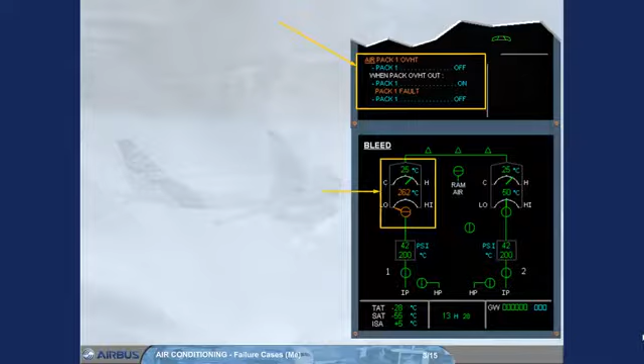Let's look at the indications. A failure message and associated ECAM procedure have appeared on the engine warning display. The ECAM bleed page has been automatically called to show amber indications, and a fault light has illuminated on the AIR COND control panel. Note: the caution message is triggered if the pack outlet temperature has been detected above a high limit, or during the flight it has been 4 times above the amber temperature indication threshold.

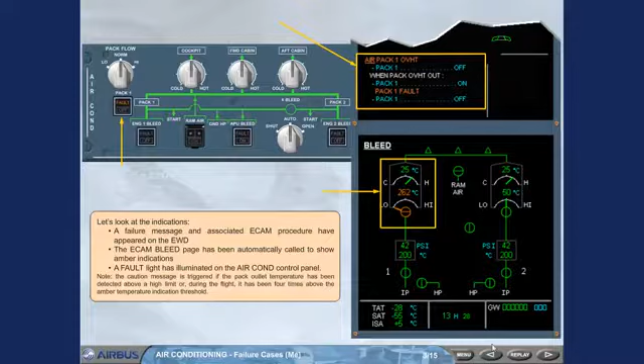Before you begin, notice that the pack flow control valve has closed. This occurred automatically to protect the pack from damage, as the compressor outlet temperature amber limit has been exceeded. The valve color indication is amber, because the valve position disagrees with the push-button switch position.

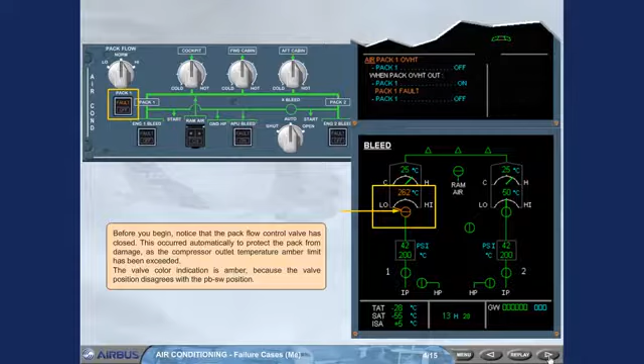The first step on the ECAM is to turn pack 1 off. This is to match the pack push-button switch with the pack valve position, and also as a preparation to reset the pack. Note that the fault light on the pack push-button switch is on, to help locate it, and to inform about the overheat condition.

The pack 1 push-button switch has been pressed off. Its off light comes on, and the pack valve indication turns green, showing valve switch agreement. Notice that the fault light is still on.

The completed procedural step disappears from the engine warning display. The compressor outlet temperature is now decreasing.

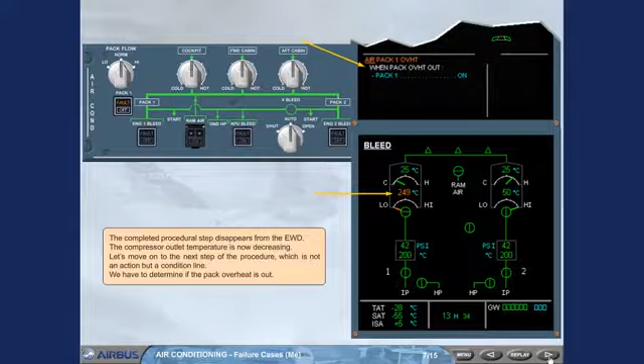Let's move on to the next step of the procedure, which is not an action but a condition line. We have to determine if the pack overheat is out. The fault light is off, and the compressor outlet temperature indication is green, so we can conclude that the overheat is out.

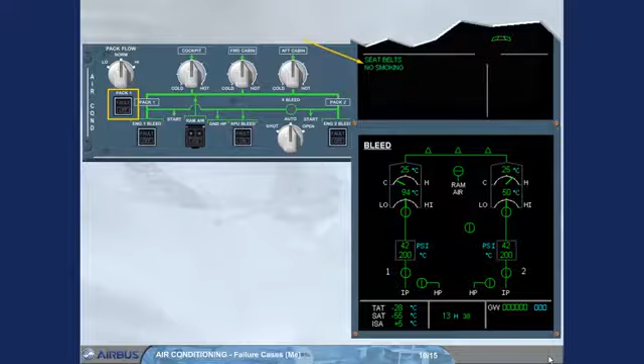Therefore, do the next ECAM action by switching pack 1 back on. When the pack push-button switch is set back to on, the off light goes off. Normal memos replace the failure message on the engine warning display, because the failure condition no longer exists, and the system display returns to the cruise page.

You have now completed the ECAM actions. The pack overheat condition has gone, and the pack is reset. Let's now review some other abnormal conditions.

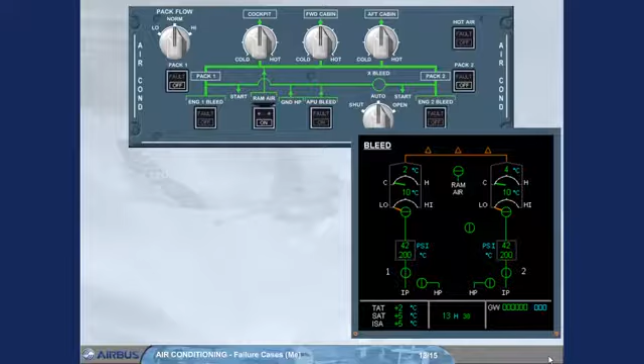If an ECAM or a QRH procedure requires the use of the ram air push button, a ram air inlet flap is operated by lifting the guard and pushing the push button. When this push button is pressed, the on light comes on, the flap opens, and the indication changes on the ECAM bleed page. Note: outside ram airflow is directly supplied to the mixer unit if the cabin differential pressure is below 1 psi.

Let's look at another abnormal indication. If too much hot air is mixed with the mixer unit cooled air, and as soon as the related duct inlet temperature is excessive, the fault light comes on, and the trim air and hot air valves are automatically closed to prevent an uncomfortable ambient temperature.

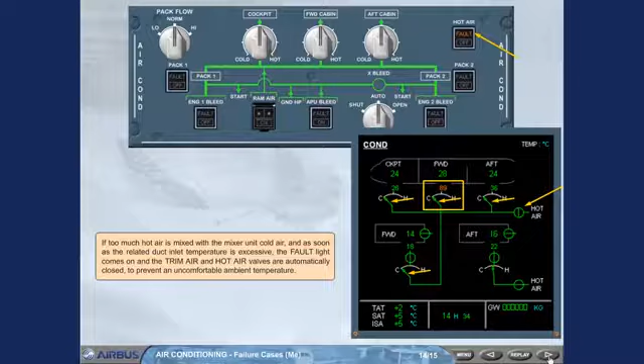The fault light goes off only if the hot air push button switch is set to off, and the related faulty duct inlet temperature has dropped below 70 degrees Celsius.